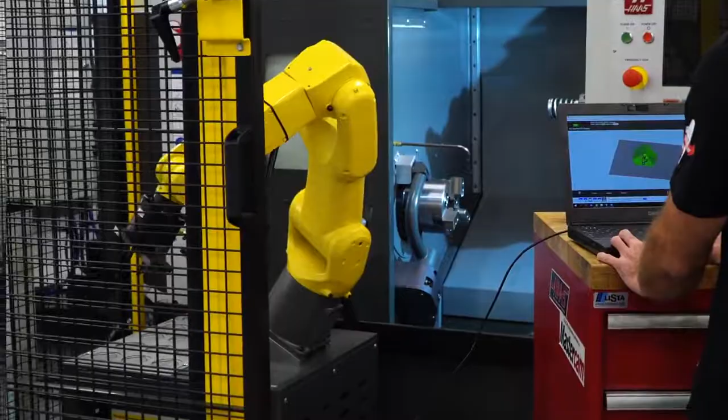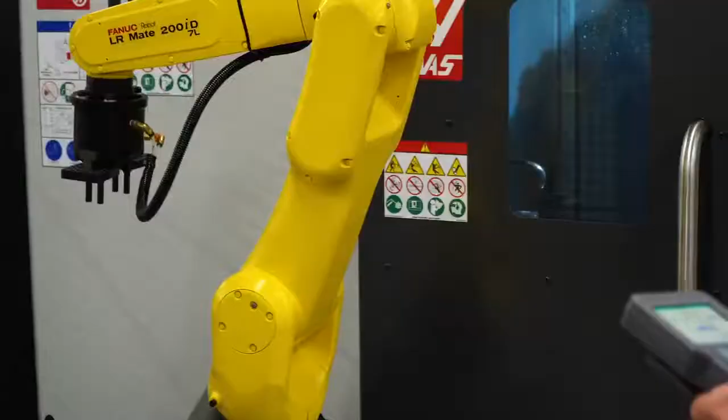Safety zones are used to ensure your robot stays within a specified boundary box to help limit the possibilities of a crash. With that said, it is still possible to cause damage to your machine or operator, even with DCS safety zones enabled, so you should still always follow proper safety protocols.

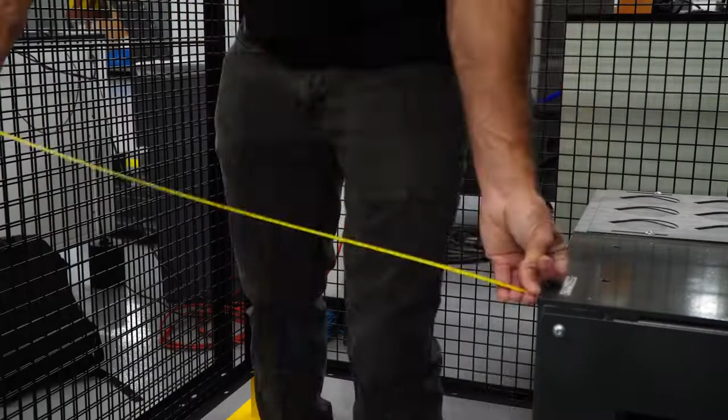The first thing we are going to do is take measurements of our desired work zone. We will need to ensure that our robot is installed aligned to the machine and fence. If the robot is not aligned to the fence and machine, the work zone we are going to set will also not be aligned.

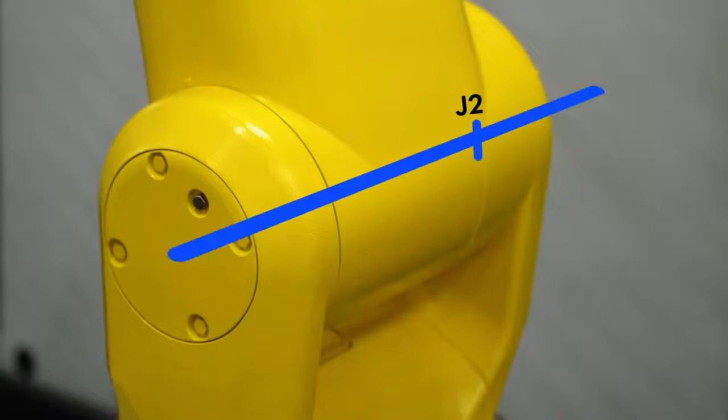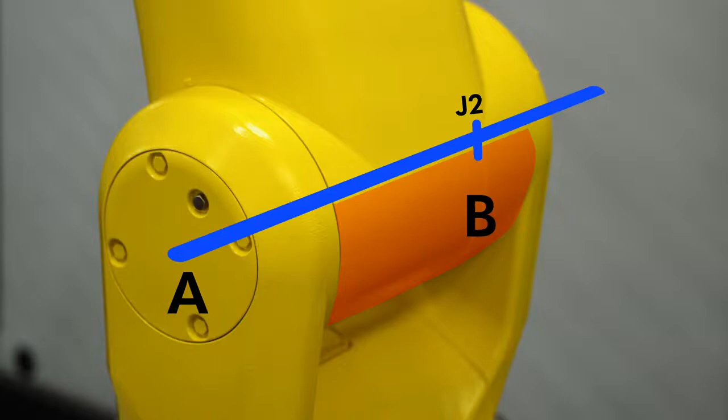The work zone is referenced and measured from the center of the J2 axis of the robot. We can use one surface and one edge on J2 in order to get to the center of the axis. Surface A, the flat on the side of the joint, and surface B, the edge of the round part. If using the flat from surface A, we will add 4.5 inches or 114 millimeters. And if using surface B, we will add 2.5 inches or 63.5 millimeters to our measurements to get closer to the center of J2.

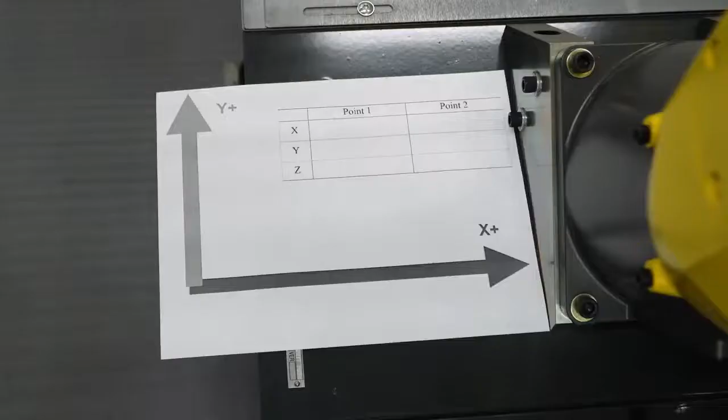Jog the J1 robot axis so that it is at 90 degrees, 0 degrees, or negative 90 degrees to align surfaces A and B with your fence and machine. Here I have a piece of paper with our coordinate system printed on it to help visualize it while taking our measurements. I'll place it like this to match the orientation of our user frame parts table we set up in the previous video, since we want our work zone to be oriented the same way.

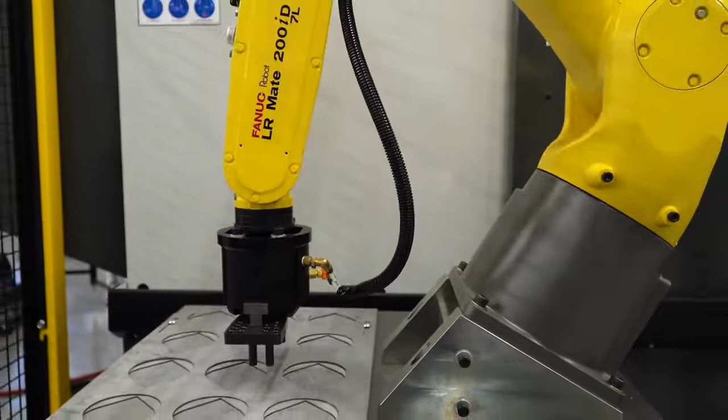If we were to use the world frame, our work zone box would be tilted at 30 degrees because our robot is mounted at 30 degrees. Now we'll need to measure the distances to the corners of our work zone. All dimensions will need to be in millimeters, but I will measure in inches and convert them to millimeters later.

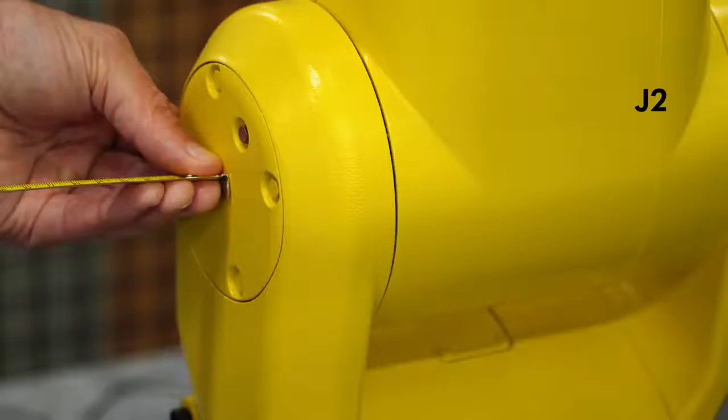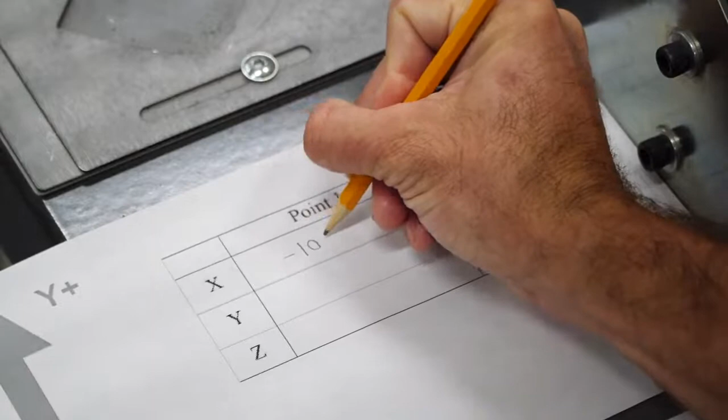First, I'll measure the distance from surface A of J2 to the fence opposite of the machine. In my case, this distance is 40 inches. Then I will add the 4.5 inches to get to the center of J2 for a total of 44.5 inches. Then I will convert this to 1,130 millimeters and subtract 120 millimeters to keep the arm a minimum of 120 millimeters away from the fence. This will make my final X negative point negative 1,010 millimeters.

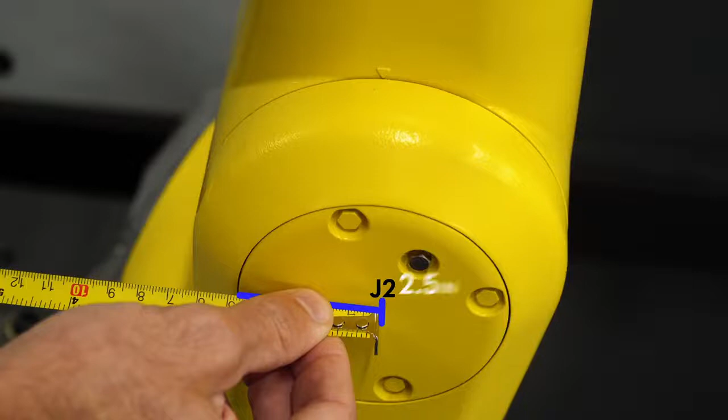Now I'll measure the distance from surface B of J2 to the fence in the Y positive direction. In my setup, from surface B to the fence is 38 inches. Now I'll add the 2.5 inches to get to the center of J2 to get 40.5 inches and convert this to 1,028 millimeters. Again, I'll subtract the recommended 120 millimeters clearance to get a final Y positive value of 908 millimeters.

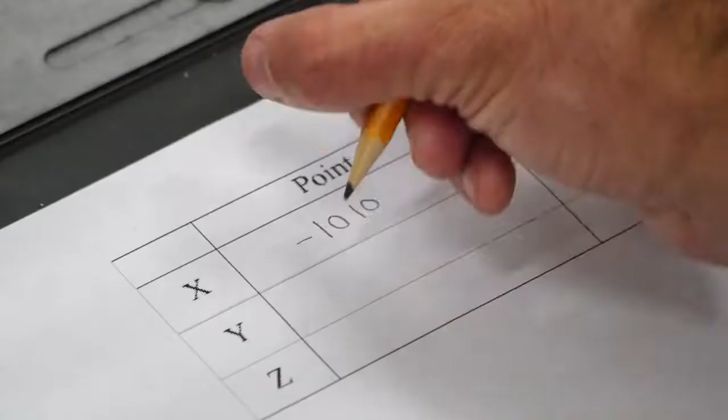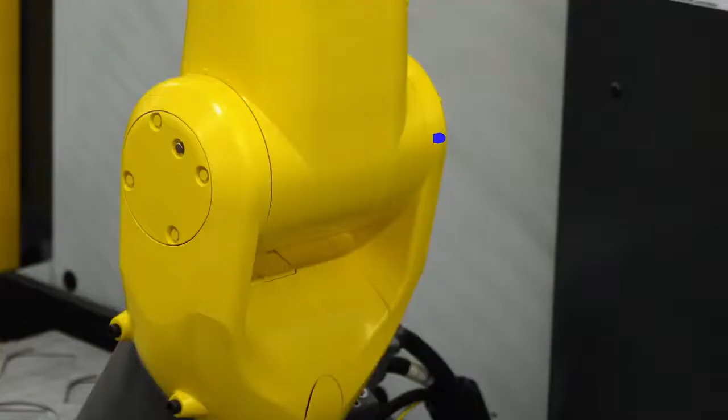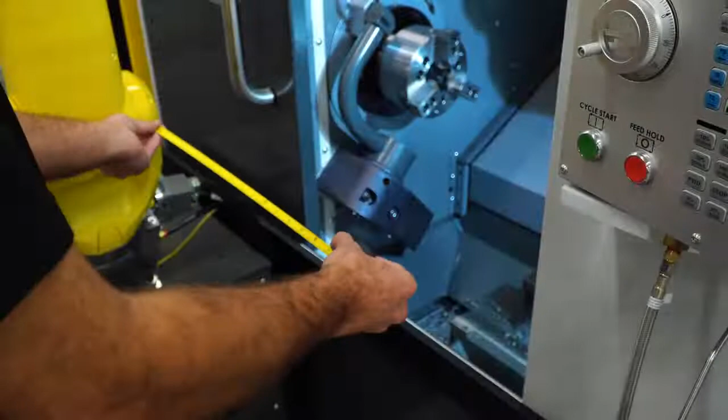To get our X positive value, I'll measure from surface A to the door. Then from the door, past the work holding, then add 4.5 inches to get from surface A to the center of J2. In my setup, my X positive value is 762 millimeters. For the Y negative value, I'll measure from surface B to the edge of the door opening, then add the 2.5 inches to get to the center of J2. For my setup, Y negative is negative 597 millimeters.

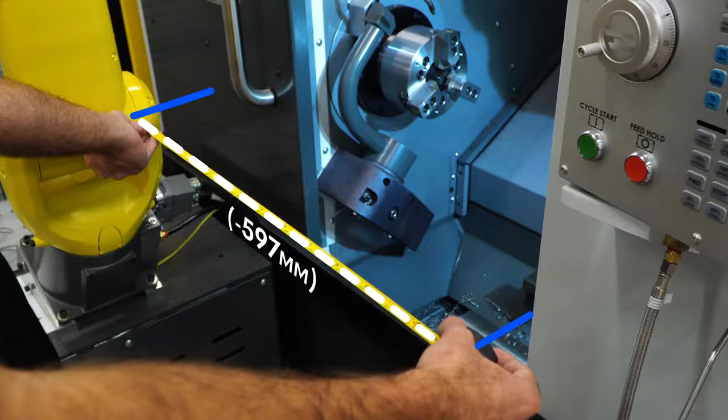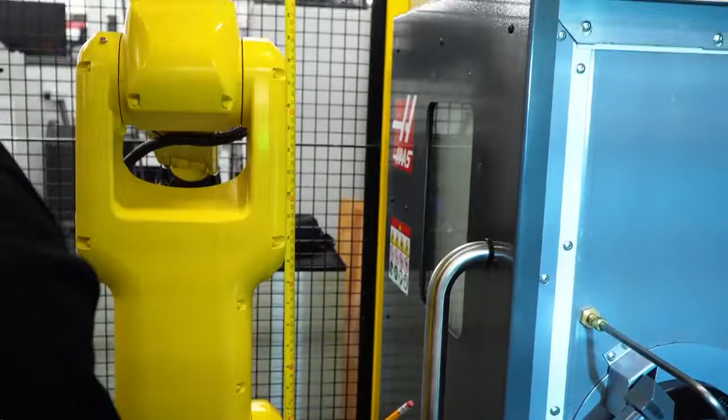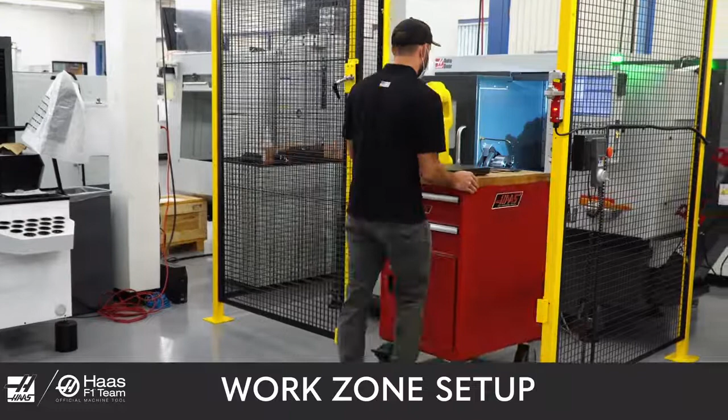For the Z positive and negative values, we'll measure from the center of J2 to the floor, and from the center of J2 to the top of the machine for values of 762 millimeters and negative 1,041 millimeters. Now we will need to set up our work zones by logging into the HMI pendant.

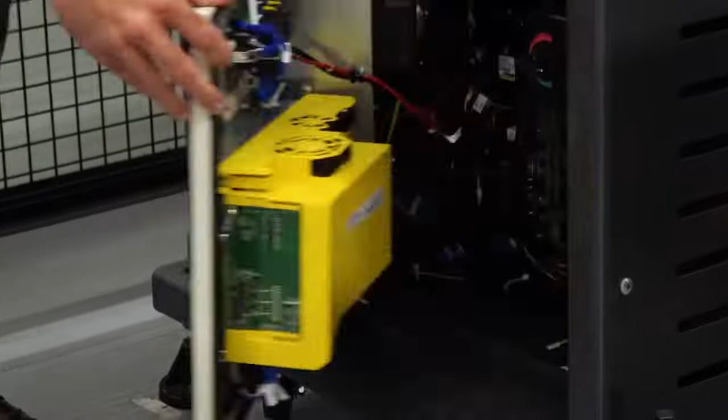To do this, you will need to connect a computer to your machine through Ethernet. Open the front door of your robot controller. Mounted to the door, there is a large yellow housing with 2 Ethernet ports underneath it. Unplug the Ethernet cable in port 1 and replace it with the Ethernet cable connected to your computer.

Alternatively, you could unplug the Ethernet cable going into your Haas robot electrical interface box and plug it into your computer. Click the Windows icon at the bottom left of your screen and select Settings. Then click on Network and Internet, then Ethernet, then change adapter options.

Right-click the Ethernet connection that is connected to the machine and select Properties. Enter an admin username and password at the prompt, then double-click Internet Protocol version 4. Select Use the following IP address. Then enter

10.72.65.83 for IP address, 255.255.255.0 for subnet mask, and 10.72.65.77 for default gateway, and click OK.

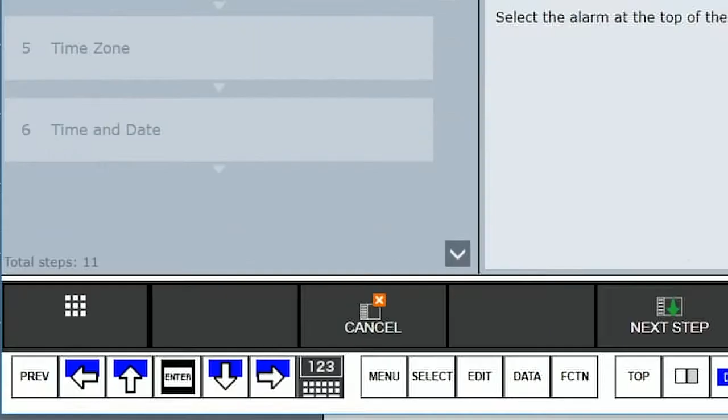On your computer, open your web browser and type 10.72.65.82 into the address bar and press enter. You will now be logged in to the HMI Pendant. Click on Navigate Pendant, then Menu and Setup.

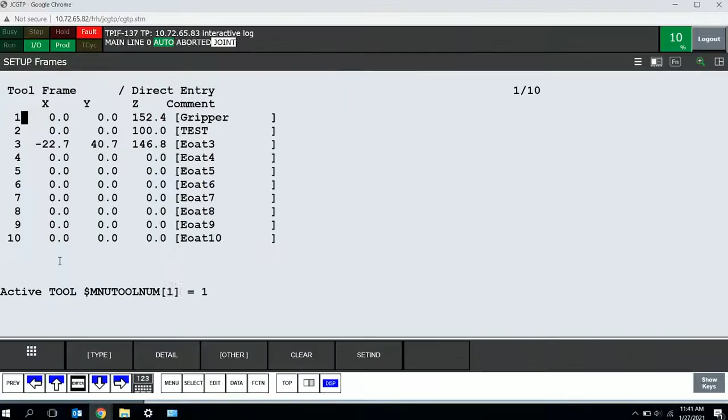Then click Type, Frames, and then Other User Frame. Click on User Frame 9 and then click Detail.

Now we are going to create a user frame to be used for setting our work zone. The user frames we created in the Haas control in the previous video can't be used here, but we will create a new one identical to the parts table frame in the former video using the direct entry method. To do this, click on W and type in -30 and press enter. Then click on R and type in 180 and press enter.

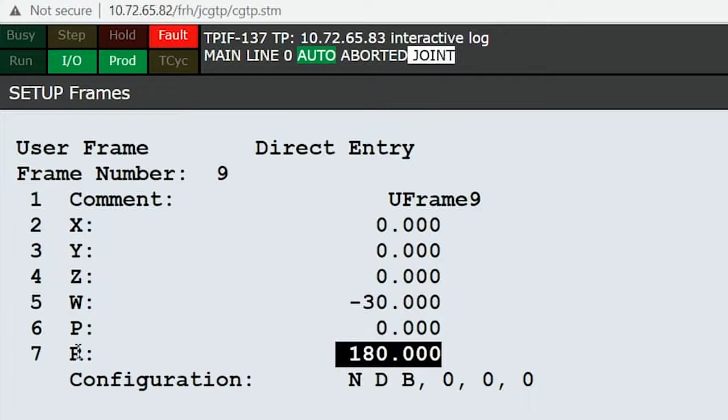How you set up this frame will depend on how your robot is set up and mounted, so be sure to see part 1 of this video series where user frames are explained. Now that we have our user frame set up, and we know the diagonal corner points of our work zone, let's start creating our work zone.

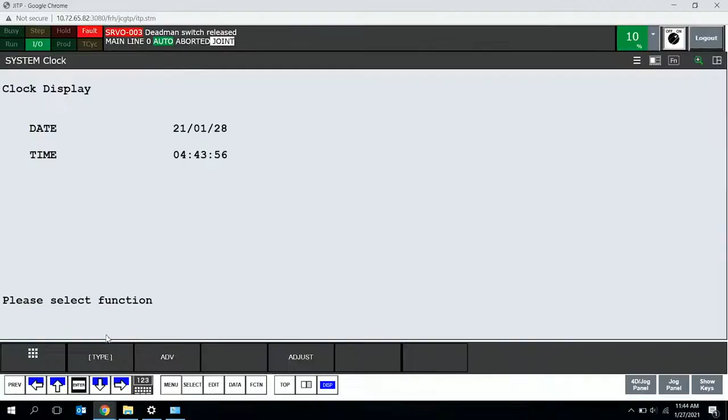Navigate to the DCS menu by going back to the main Pendant page and click Jog Panel. Press Menu, and then 0 Next, and then 6 System. Enable the pendant using the on-off button at the top right, and then press Type 9 DCS. Then click 10 User Frame and press Enter.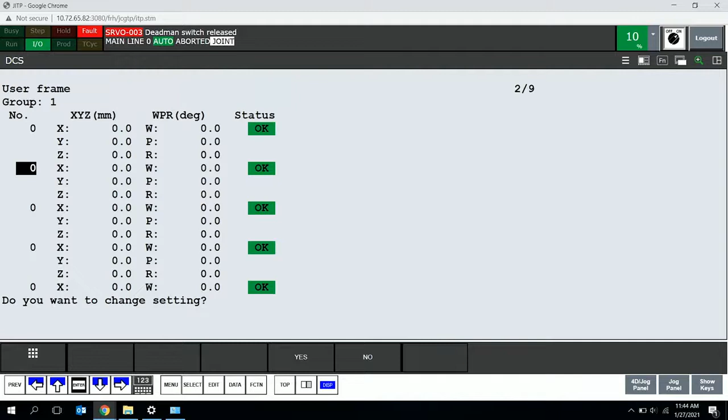Select the second 0 under the number column list. A confirmation question will appear at the bottom of the screen. Press Yes to confirm the change. You should see your W and P values change to what we input earlier. Select the second 0 under the number column list and press 9. Now press Previous to go back to the DCS menu.

Click 5 Cartesian Position Check and press Enter. Then click on number 1 and press Enter again. Enable the position check by clicking 2 Enable/Disable, then clicking Choice at the bottom, and then clicking Enable on the pop-up.

Change method type to Work Zone Diagonal by clicking that row and then clicking Choice at the bottom and selecting 1, Working Zone Diagonal. Target Model 1 should be Robot Model, and Target Model 2 and 3 should be disabled. You can select Robot Model as Target Model 1 by clicking Choice at the bottom and then selecting Robot Model.

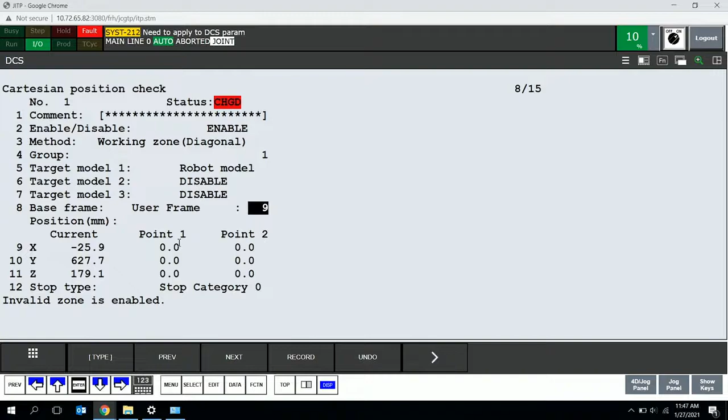Set Base Frame to User Frame 9 so that our work zone references this frame that we created earlier. For point 1 and point 2, enter the measurements we recorded earlier. These will be the diagonal points of the work zone box. Our point 1 will be X -1010, Y +908, and Z +762. Our point 2 will be X +762, Y -597, and Z -1041.

Now highlight Stop Type and click Choice at the bottom, and change this to Speed Check 1. Next, we will set the allowed speed for the robot to move when it is outside of our newly created work zone. Click on Speed Check and press Enter.

Click on Limit 1 and enter 20 to set our speed limit when the robot is outside of our work zone to 20 millimeters a second. Now set the delay time to 0 milliseconds and permissible distance to 0. Now that we've set this, the robot will alarm out whenever it leaves the work zone at a speed over 20 millimeters a second to prevent a crash.

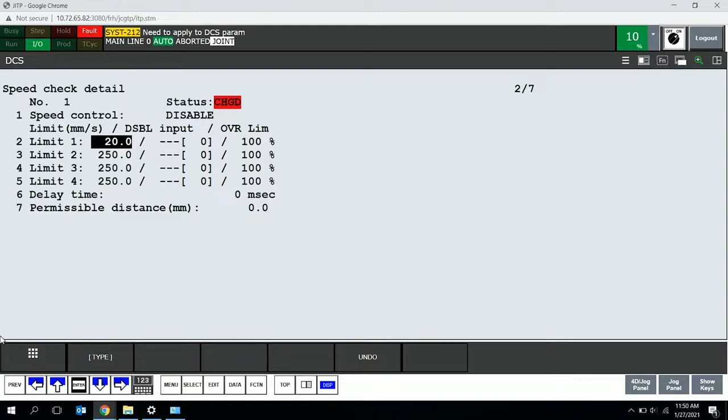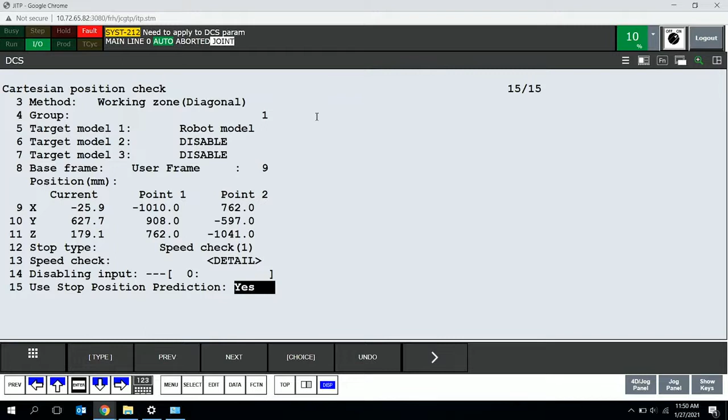Click on Previous at the bottom to go back to the previous menu and click on Use Stop Position Prediction. Then click Choice at the bottom and select Yes. Now let's go back to the main DCS screen by pressing Previous 2 times.

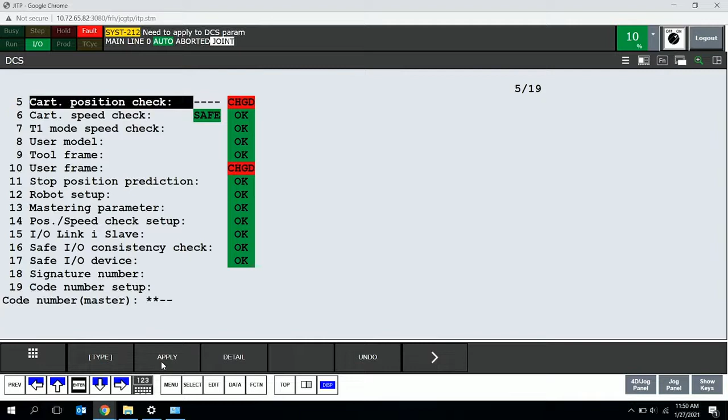Now we will apply all of the changes we made in the DCS menu. Any DCS section that was changed will show a red change next to it. Press apply at the bottom and enter 1111 for the master code. This will take you to another menu that will show you the changes made in the DCS menu since the last time they were applied. Press OK if all changes are correct.

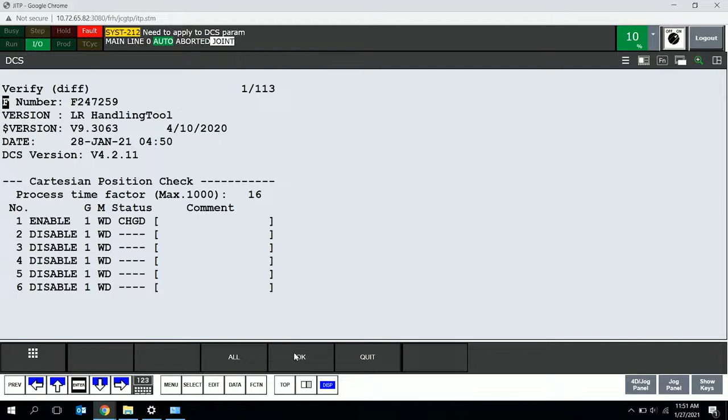The red changed fields will now be yellow pending fields, indicating that they will be changed after cycling power. Now close the iPendant window and cycle power on the robot controller, waiting 5 seconds before powering it back on. Setup of the work zone is now complete. If any part of the robot leaves the work zone at a speed greater than 20 millimeters a second, it will alarm.

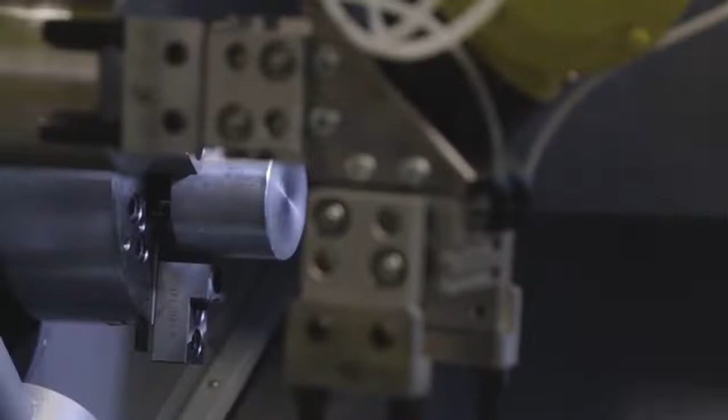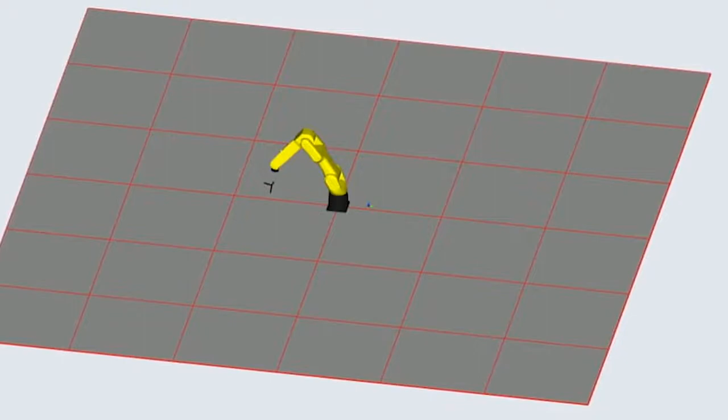Now that our work zone is set up, let's go to the 4D graphics section to visualize our work zone in relation to the robot. Access the JITP iPendant and navigate to Menu, Next, then 4D graphics. Here you will see your robot virtually on the iPendant in its current position. To see the DCS work zone we just created, click on Visible on the bottom bar. You might need to click the right arrow to see this.

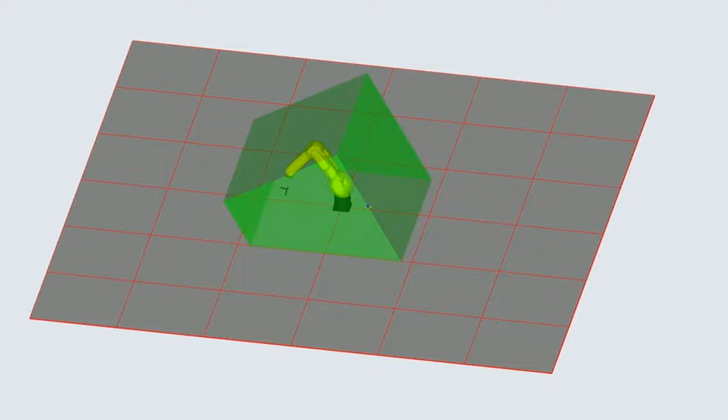A new menu will be displayed in the top left of the 4D display. Click on 4D DCS display. It will turn a shade of blue to signify that it is on. You will see a box appear if your DCS zone is enabled and set up. Verify that the work zone that appears is surrounding your robot. If the box is red, that means that part of the robot is outside of the work zone. If the box is green, your robot is inside of the work zone.

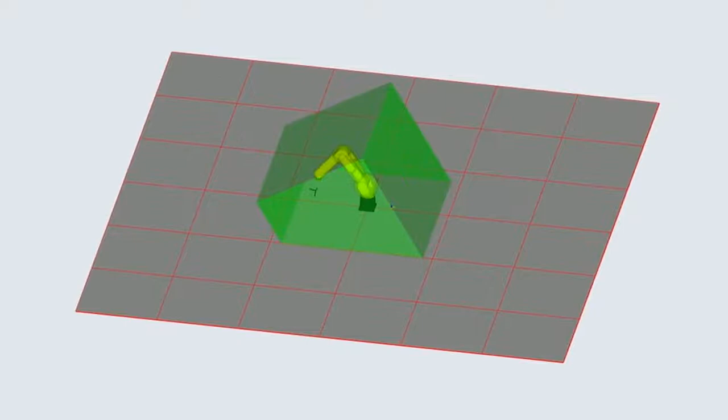The robot is displayed in real time here, so you can watch this on your laptop or computer while you jog the robot around. Our work zone will appear angled since we are offset at 30 degrees to compensate for the 30 degrees our robot is mounted at. Now let's verify that our work zone is set up properly. To do this, we will jog the robot outside of our defined work zone at a rate higher than 20 millimeters a second.

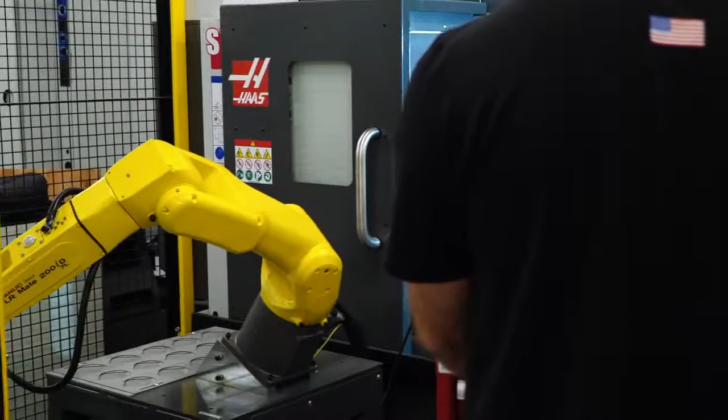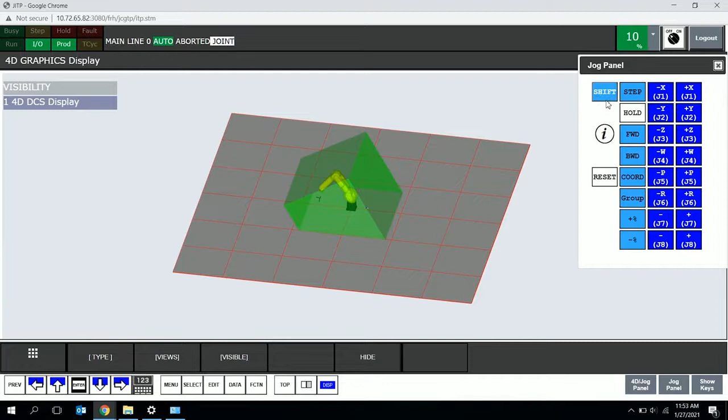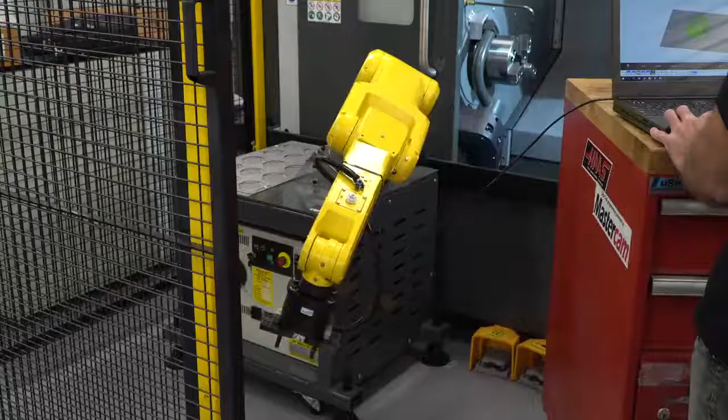Click Jog panel at the bottom right of the iPendant window. This will bring up a pop-up for jogging the robot using the iPendant. First, press the reset key to reset any alarms. Now, click Shift to virtually hold down the Shift key. The Shift key needs to be held down while jogging the robot. Now you can jog the robot using the X, Y, Z, W, P, and R, or J1 through J6 keys. To change between jogging methods, click the coordinate key.

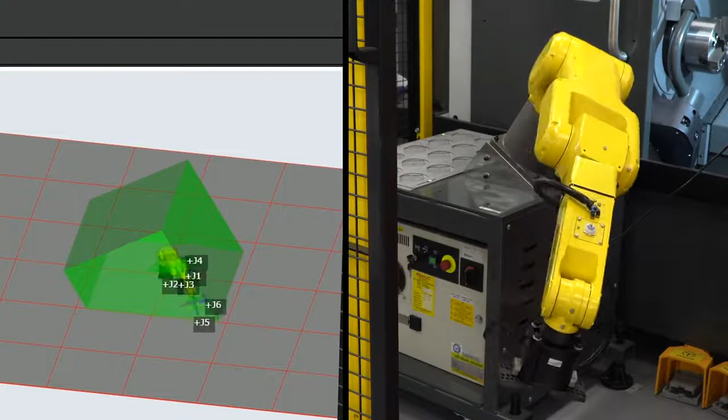Now let's jog the robot outside of the work zone at a speed higher than 20 millimeters a second. If the box turned red on the 4D display and the alarm was triggered, your work zone is set up correctly. Reset the alarms, then jog the robot back into the work zone at a rate slower than 20 millimeters a second so you don't set off the alarm again. And that's it. Our DCS safe zones are now set up.